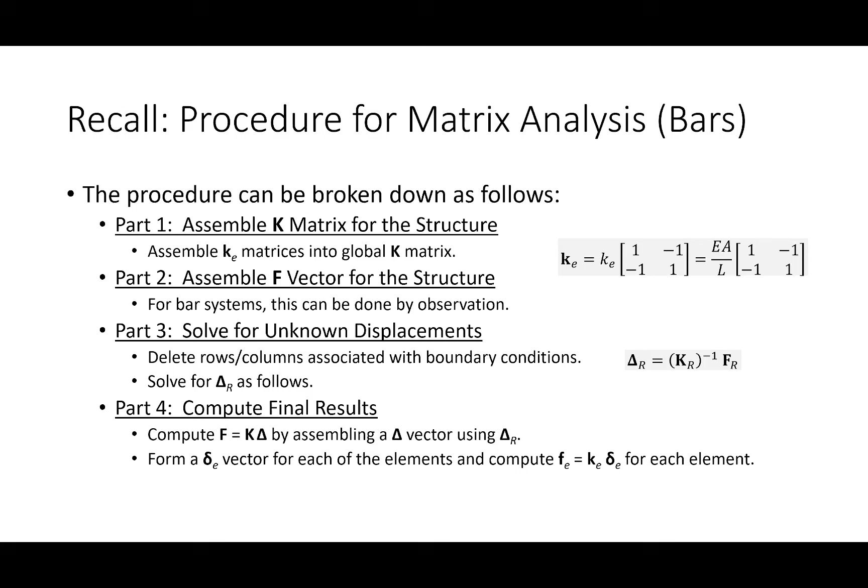Now, don't forget that we are going to be doing matrix multiplication, and we're going to be doing matrix operations, so let's just make sure we are familiar with a lot of this stuff. So if I have a matrix or a vector, I can do a series of things to them. I can add them. I can perform scalar multiplication. I can multiply the matrices, provided they're dimensionally congruent. And then a couple things about matrix multiplication.

It's generally not commutative. In other words, A times B does not equal B times A. And so that's particularly true, for example, in this step, like we can't just flip that around. It has to be in this order. And you'll see why here in a bit.

There are two cases of commutativity. If one of those matrices happens to be the identity matrix, then it doesn't matter which direction you multiply; you can do A times I or I times A. And then the other special case is if one is the inverse of the other. Like if B is the inverse of A, you can do AB or BA and get the identity.

We can invert a matrix. Take a linear algebra class to learn all about the various algorithms on inverting matrices. We're just going to surrender to the software in here. There are some closed form formulas for 2x2s and 3x3s, but past that it just gets ridiculous and it's better to just let the software do it anyways.

And then finally we can transpose a matrix. And remember what transposing is? That's when you flip it about the main diagonal. Remember that? Where you have that main diagonal and you just flip the terms. We are going to see transposes today, and we won't see a symmetric matrix today. A symmetric matrix is if a matrix equals the transpose. Well, I guess that's not true because stiffness matrices, spring matrices, they're all symmetric. So, but I'm getting ahead of myself.

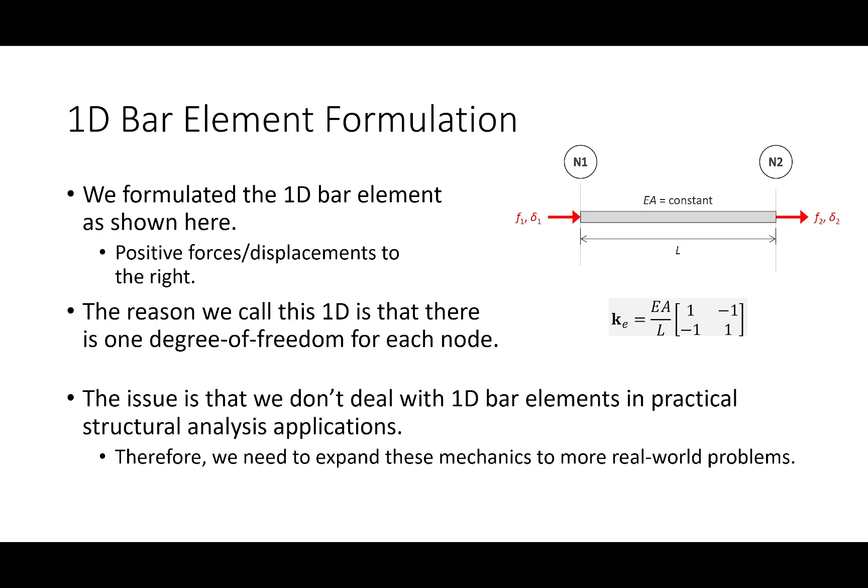Now, I want to be clear that the difference between a bar element and a truss element is just the ways that the joints or the nodes can move. It is still a bar, and it still has the same mechanics. Remember one of our assumptions with trusses is that they can only resist forces axially, and the stiffness is defined by EA over L. So I propose we're going to have an EA over L outside here, and we just have to figure out what goes in here.

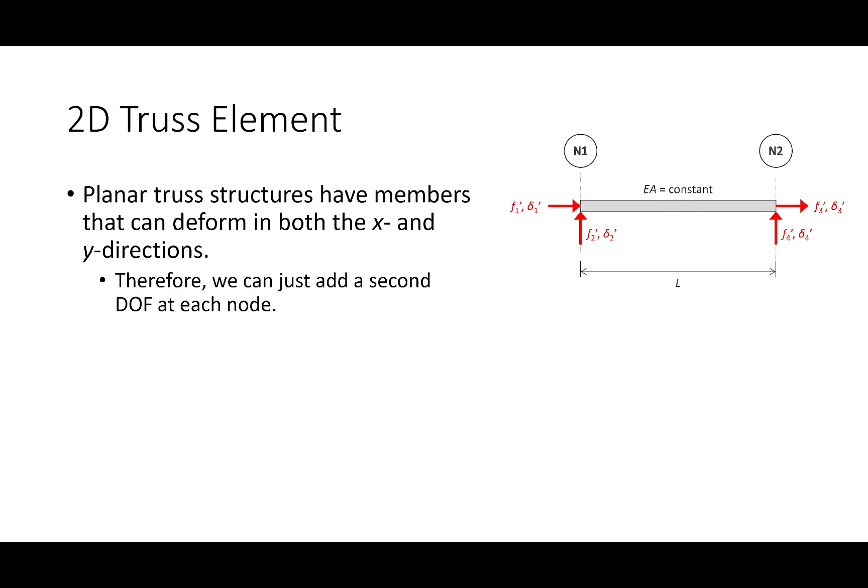I'm so sure that I'm right that I even have that there on the slide. So there we go. That's the stiffness matrix for a bar element or a truss element. It's basically the same thing, just expanded to incorporate other degrees of freedom.

Yes, that's KE prime. I'm going to get to that here in a bit. I'm glad you noticed that. Watch this. You may be wondering about that prime symbol. So I put this little KE prime here, and I'm calling this KE prime, and you're wondering why am I doing that?

You might be wondering what's going on with that K prime. For now, just sort of bear with me. I'll get to that here in a bit. But that was there on purpose. In fact, it's not just here. Look here, you can see F1 prime, delta 1 prime. You can see the primes here as well. That's on purpose too. Okay?

But assuming everything so far, at least from a base understanding of the mechanics, does this make sense? Everybody okay with this? Okay. All right.

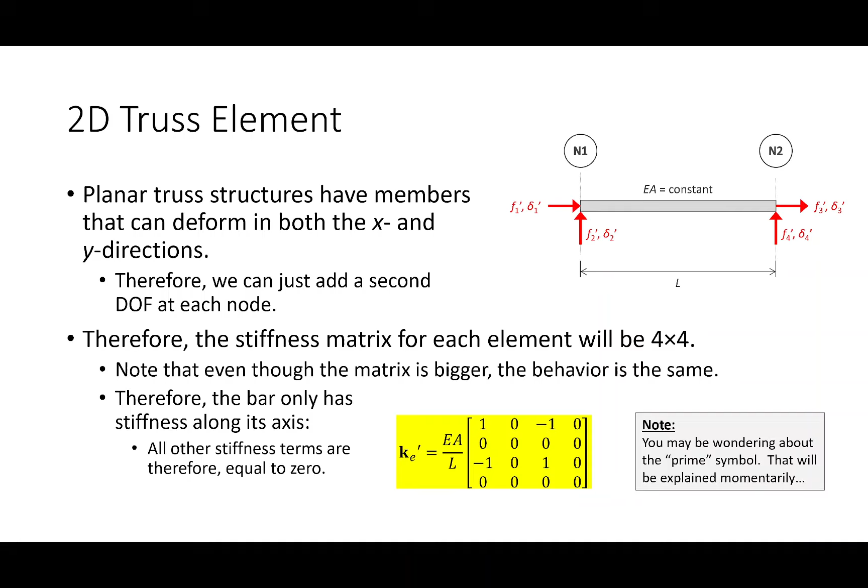Now, let me see if I can sort of explain the real issue between bars and trusses. And I want to see if I can explain that by looking at stiffness matrices a little bit of a different way. So follow my logic with me for a second. Remember, how did we come up with this stiffness matrix at the very beginning? Like, how did we get these terms?

We took the element and we deformed it, right? We actually took the element and we stretched it and we squished it and we recorded the forces necessary to produce those deformations. And then all we did is just write it in matrix form, and that was our stiffness matrix, right? That's what we did to get this right here. Everybody with me on that? Okay. All right, so keep that thought in your head.

And also let's look at this. This was our basic definition of stiffness. Ignore all the matrix hullabaloo. If you want to relate forces and displacements, the force can be the displacement times this term EA over L. And this term EA over L is what we term the axial stiffness. Whether it's a bar or a truss, that would be the magnitude of the stiffness. Does that make sense?

Okay, so let me ask you a question. What if delta equals 1? What does F equal if delta equals 1? It equals EA over L, right? Make sense? So here's my point. Could we say that the terms in this matrix are the forces necessary to produce those displacements?

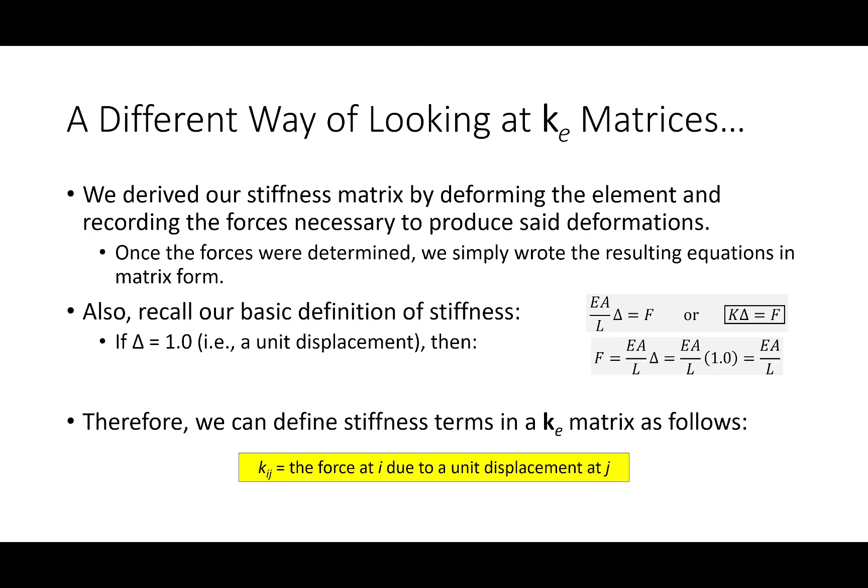I just want you to think about these terms as forces because that's the problem with assembly, okay? And that'll start to get into why we've got these primes, what's the deal with this T matrix, and so on and so forth. So bear with me. Everybody good so far? So give me a little bit of rope here. We'll see what we can do.

All right. So again, I want you to think about these terms as forces. And if you think that, then would a fair statement be that assembly is sort of just force summation? Like, aren't we just summing up forces? I mean, how did we assemble bar elements? We put the stiffness terms where they go in the big old matrix, and anytime those terms overlap, we add, right? That's how assembly worked. Anytime the terms overlap, they add.

Let's see if we can put a picture on that. See, the problem is, when we deal with trusses, and this is particularly true with trusses, the issue is that if all we did was just use this matrix directly, we wouldn't be able to do assembly. And the reason why is because the forces wouldn't be facing the same way. Let me put a picture beside it.

Okay, so let's say we had a real simple truss problem. Here's the truss problem. So I've got 3 joints. How many elements do I have? I've got 3, right? So how would assembly work? I would write a stiffness matrix for this element, for this element, for this element, and then I'd assemble it the way I would assemble any bar element type system.

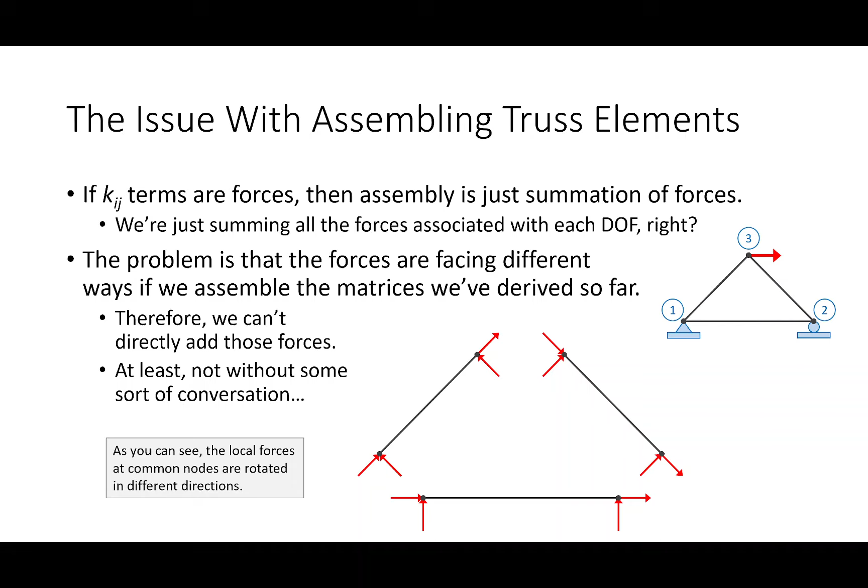I guess my question is, how do I do assembly if these forces and these forces are all facing different directions? Do you see what I mean? That's the problem, okay? The problem is that these forces are all facing different directions, and so I can't do assembly. So the way that I fix that is I do a transformation.

That transformation involves taking this system and turning it into this system. In other words, taking each of these sets of forces and rotating them so that now they're all facing the same way, and so when I assemble them, I can just add them directly. Does that make sense? So when I asked what's the difference between a bar system and a truss system, the difference is that before we do this assembly, we have to do this transformation. We have to take KE prime and turn it into KE.

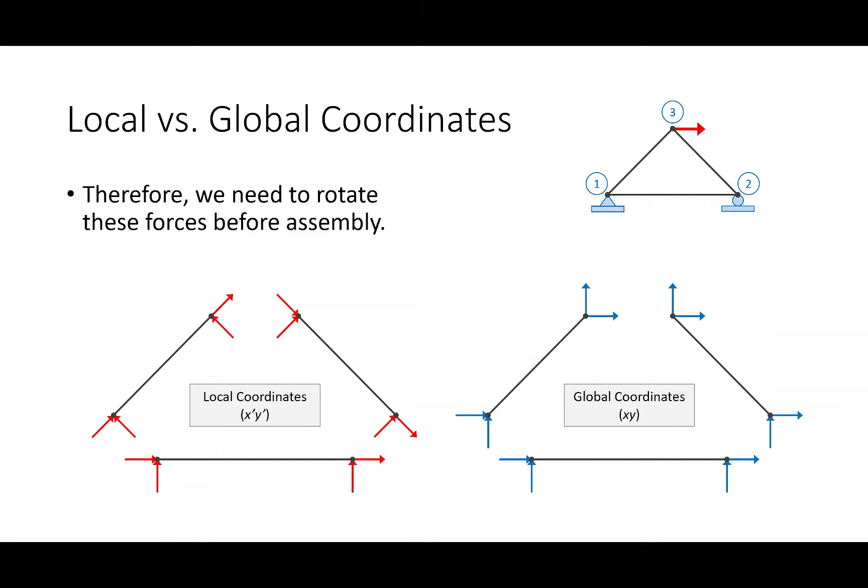That also hopefully explains this whole prime symbol that I've been mentioning. Specifically, to give a little bit of rigor to this, for a given element, if I look at the degrees of freedom at the end of each joint, I can express them in local coordinates, which is along the element. So if I have an element faced this way, I can say here's degree of freedom 1, 2, 3, 4. There's an advantage to defining degrees of freedom that way, because the stiffness matrix is really easy to derive.

But the problem is that's not really good for assembly. What I want for assembly is right, up, right, up. I want them in the same direction for all of the elements, in some sort of global coordinate system where each element is referenced the same way. So local coordinates are easy to derive, but global coordinates are easy to assemble. Does that make sense? So we need to be able to transform from local to global.

What I need is, if I have local forces or displacements, or global forces or displacements, a way of getting from here to here. The way that I do that is through a transformation matrix. Now this transformation matrix looks really daunting, but it's going to be really easy. The big thing to recognize is that the terms inside this matrix are just trigonometry. Actually very little trigonometry, it just gets repeated a lot. Let me show you what I mean.

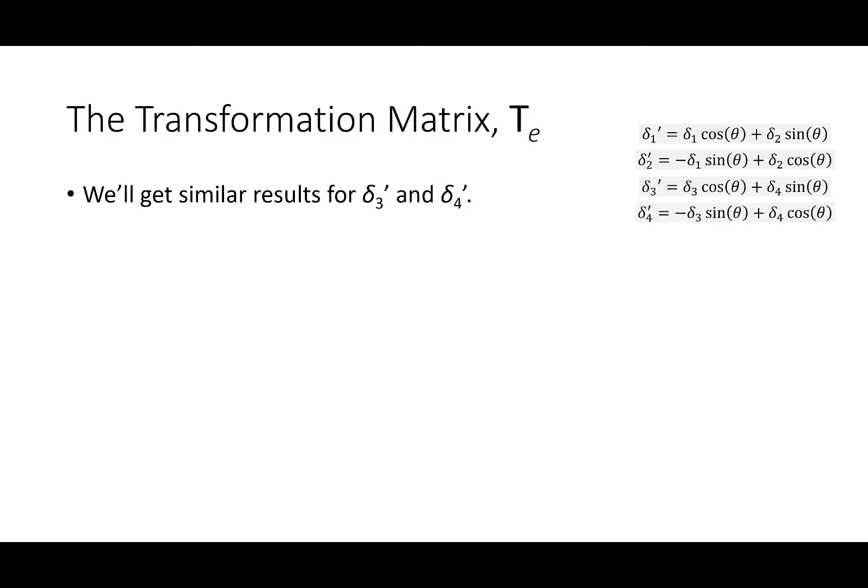How about for delta 2? Here's the element. Delta 2 is going to go up like this. So I'm going to split this up into x and y. But does anybody see a problem with this one? What did we say is positive? To the right, and this is going to the left. So I propose we put a negative sign here, because it's flipped the other way. Does that make sense? So we just keep doing this, the same thing for delta 3 and delta 4. Put all that in matrix form, and that's your T matrix.

That's it. Yes? Will it be negative delta 2 or negative delta 1? Sorry, what? Negative delta 1, because delta 1's going to the left. Yes. Similarly over here with this one, it'd be negative delta 3. And I propose this is your transformation matrix.

And what is this transformation matrix? It's just a lot of trig. Why are there zeros here and here? Well, there's zeros here and here because if you're transforming delta 1 and delta 2, the other two have nothing to do with that. You're just transforming this into this and this into this. So where they mix and match, they don't have any interaction. Okay. Does that make sense?

Okay. All right. Now I'm going to throw a little bit of a weird observation at you. Transformation matrices have a very peculiar property, and that property is called orthogonality. Now, this is very specific to transformation matrices or anything that rotates in general, and it is very peculiar: a matrix is orthogonal if its transpose is the same thing as its inverse. That is not the case for most matrices, okay? Orthogonal matrices are very special in that regard.

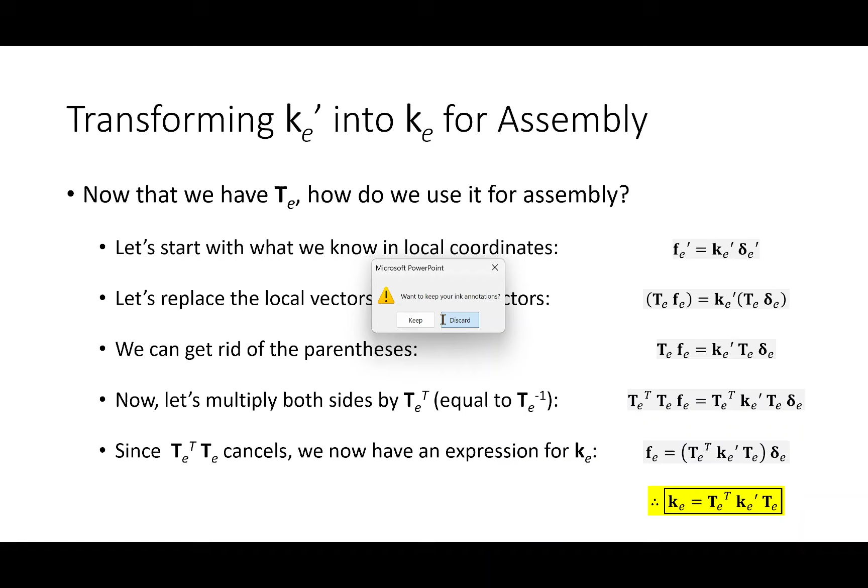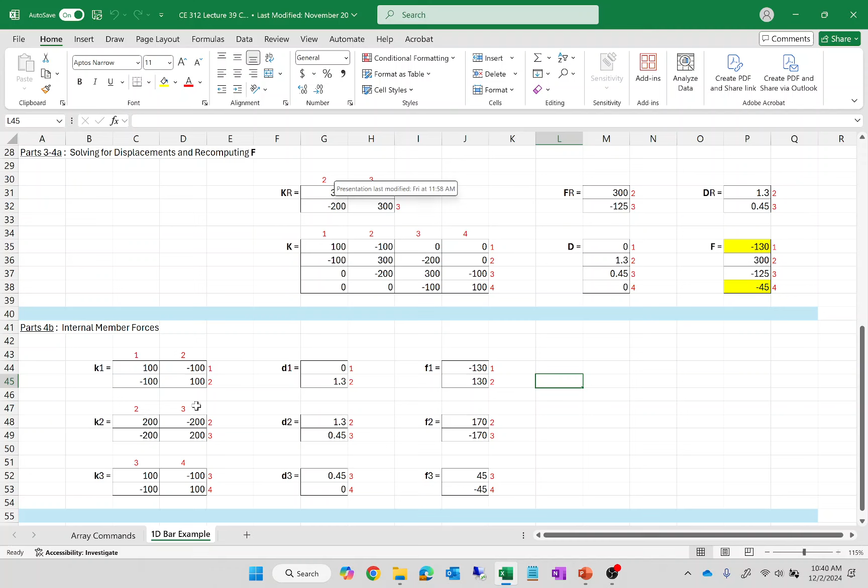I'm going to show you something. I pulled this up a while back. Let me show you something. I posted this to Blackboard, by the way. Remember when we first started doing matrix calculations? And I said, okay, here was our problem, right? And I said, here's all this practice, and you ought to make sure that you're comfortable with this. And then I told you, here's this problem. And I said, trust me, this formula looks kind of nuts, but I promise you we're going to do it. Well, now you can kind of see what I was talking about.

Don't worry, we'll practice a lot of this stuff on Wednesday. I know I'm throwing a lot of theory and matrix stuff at you. We're going to do a start to finish example on Wednesday to make sure we're comfortable with a lot of this. So what's our procedure? How do we actually go through start to finish? How do we actually do a truss problem? Well, let me show you how this works. Okay, I'm going to pass these out. And by the way, on the exam, I'm going to give you both the bar element handout and the truss element handout, so you're not going to have to waste space on your formula sheet with these.

The thing about matrix analysis is that there's a lot of theory and a lot of ideas, but when you actually get to apply it, it's actually pretty easy. And again, don't worry, I'm going to give you a start to finish example on how this stuff works. So let me show you how we perform matrix analysis for truss members. So basically what I'm talking about now is what Mastan was doing in the background. Remember how you build the model and you click the little analyze button and it would just do it? This is what it was doing in the background.

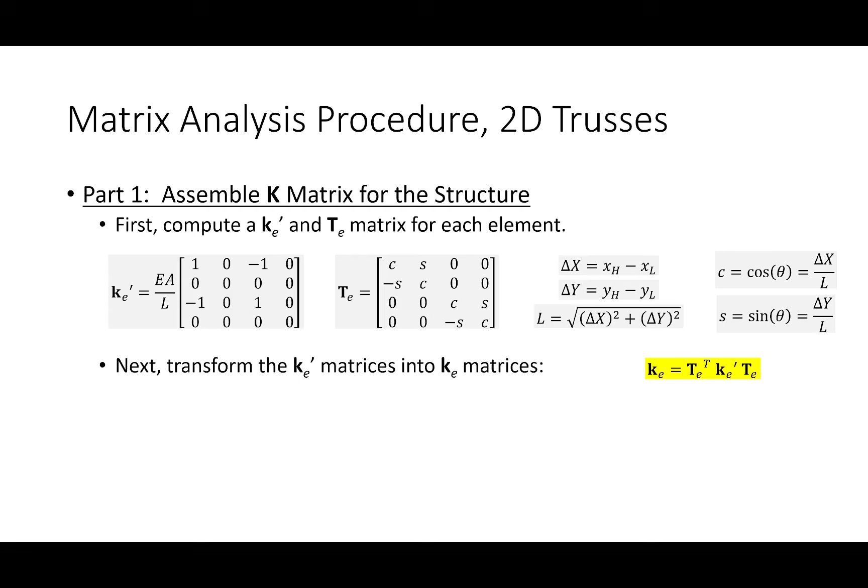We'll then take these, transform them into global matrices by T transpose K prime T, right? So this transpose times that times this, right? Which you can do in Excel or any programming language. It's really easy to do. And then assembly is no different. It's the exact same process. The only thing that's worth mentioning is that the matrix is just bigger, okay?

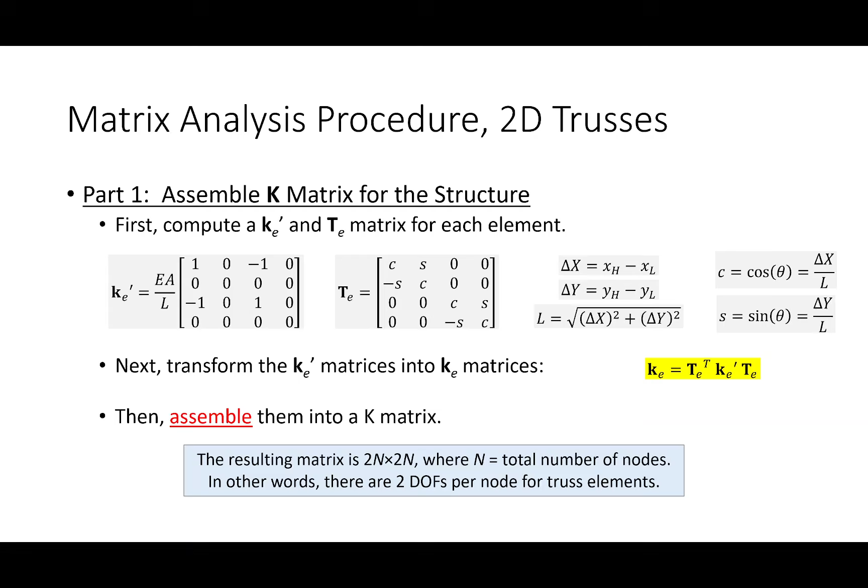So if you remember for bar elements, the big old stiffness matrix was n by n because there was 1 degree of freedom for each node, right? Now it's going to be 2n by 2n because each node's going to have 2 degrees of freedom, okay? So it's just going to be bigger, right?

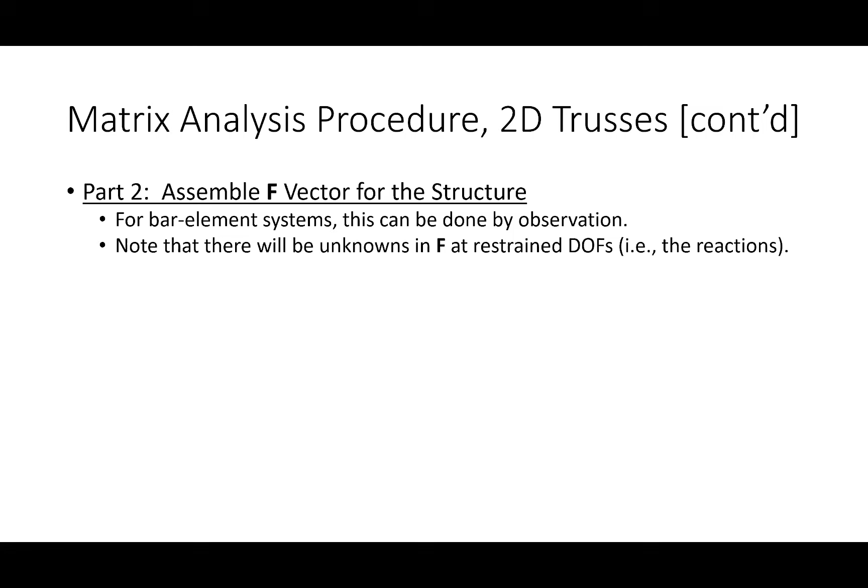What do we do then? We handle our F vector. No different as before. It's the same process. Okay? There's still going to be unknowns where the reactions are, and everything going to the right is positive, left is negative, up positive, down negative. No difference. Same process.

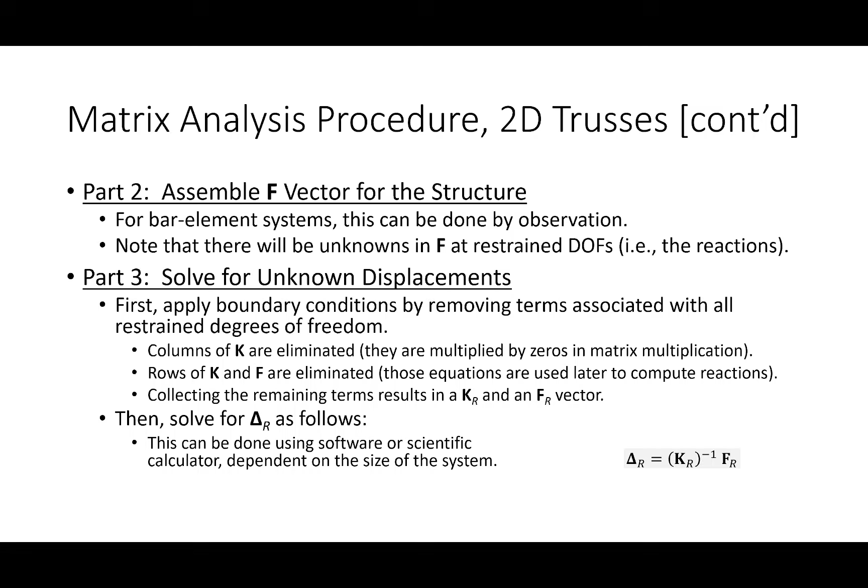What do we then do? We solve for unknown displacements. The exact same process as before. We got a big old K matrix, a big old F vector. Knock out the rows and columns associated with the boundary condition. Solve. Easy. Okay? What's next? Computing the final results. Okay? And how do we get the final results?

We take F equals K delta for the reactions, and we calculate a local force vector for each element. How do we get the local force vector? We just have to add another term here. So we do K prime times the transformation matrix times delta. Because basically the idea is we're going to have a global displacement vector for each element. We need to transform it into local coordinates, then multiply it by its local matrix.

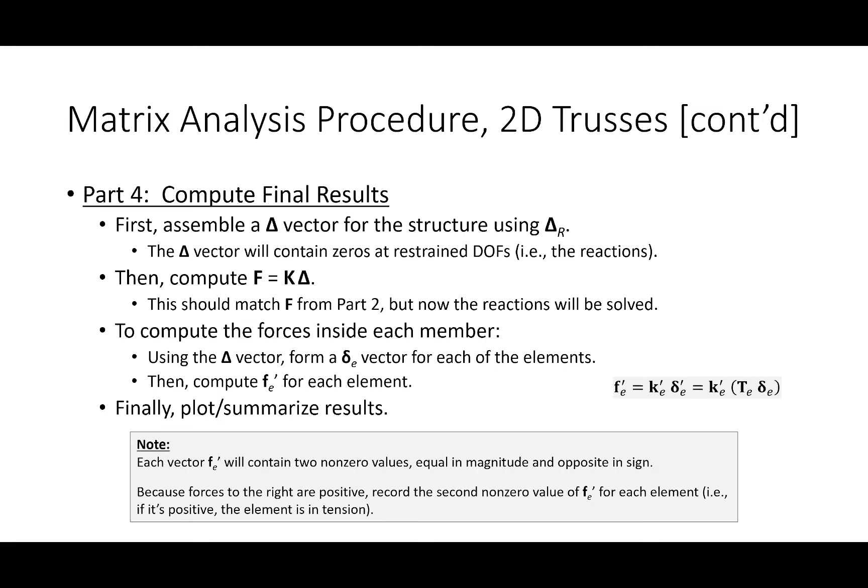And when you look at these FE matrices, it's going to be a lot like bar elements. There's only going to be 2 values, and they're going to be equal in magnitude and opposite in sign, just like it was for a bar element. But it'll be like a value 0, value 0. You just take the second value, same way as we did before. Okay? And that's it. That's matrix analysis for trusses in a nutshell.

But the idea is that this process for this little truss, it's the exact same process for a gigantic truss or a gigantic indeterminate truss, right? You'll see that it's pretty systematic, pretty straightforward. It's not really even difficult. The one thing that you're probably going to get alarmed by is the process is just long.

And so I will just go ahead and say, right now, you are not going to have to do a full-blown start to finish one of these on the final. Just don't worry about that, okay? That's not what's going to happen. You might have to calculate a piece of a problem on the final, but again, my rule of 3, I apply it here too. So, does that sound good?